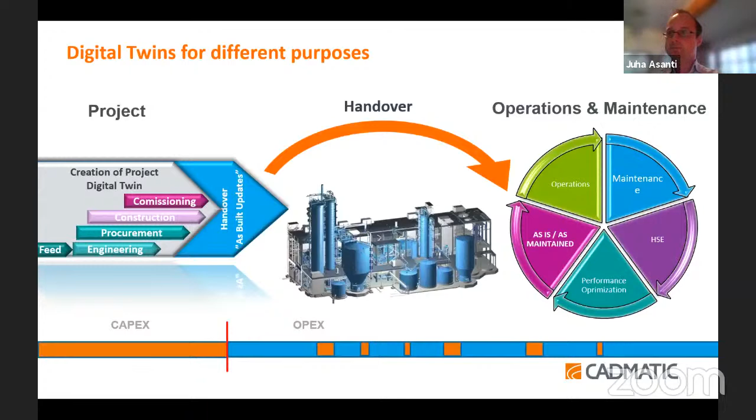Digital twins can be used for different purposes throughout the whole life cycle of a project, starting from the very early design and FEED phase, through engineering, procurement, construction, commissioning, and then handing it over to the owner or operator. It can bring huge benefits when used in operations and maintenance, as we see every day when discussing with our clients who are taking advantage of this technology.

About the creation of the digital twin, how you get the maximum out of it is that you start building this kind of digital twin from the very early beginning of the project. That is when you are doing the 2D and 3D design of the plant, so you get all the design information. Then you connect all the project related data to it, like project management systems, ERP, document management, project planning and so forth. When these are all connected from the beginning, that's when you get the maximum out of it.

In this picture, trying to simplify how you create a digital twin, basically you have the 3D model and then you combine it with different kinds of databases within the company, or can also be outside the own company.

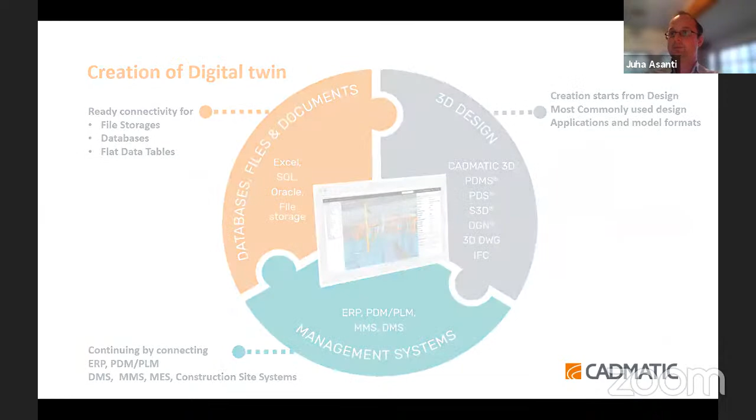Some of the use cases, and what I'd like to remind is that only the sky is the limit when you're building your digital twin and going through your digital journey, because the opportunities are huge, and there's no two companies using digital twin in exactly the same way. Companies can and should build the digital twin around their business models and applications. But some of the crucial elements of a digital twin are first of all, you need an easily accessible web-based system which can be accessed regardless of physical location.

You need to be able to access the model, the digital twin, in a fast and easy way. Then you have documents integrated or accessible, so within this digital twin you have access to all project related documents with just a simple click. Then you have these external systems integrated, like ERP and document management, just to name a few.

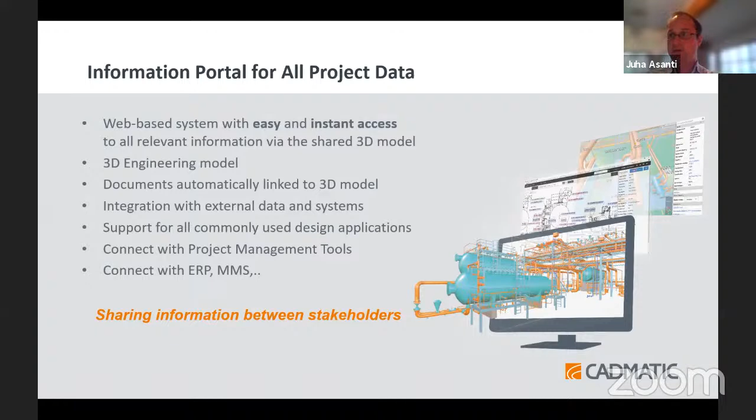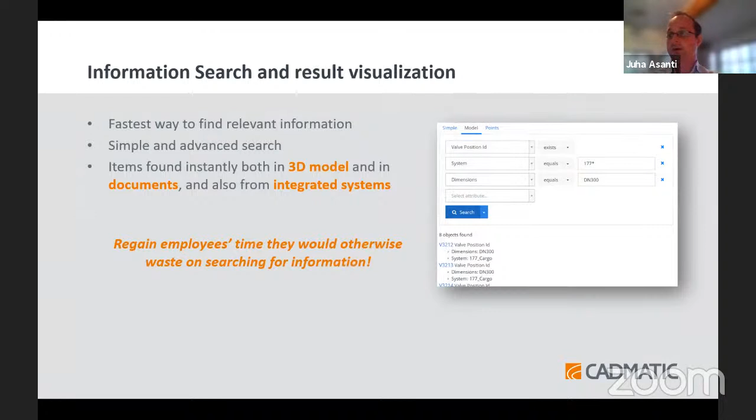Searching information has to be easy, so instead of going through all the different documents or applications, you can simply use simple search functionality, type in a keyword, and it gives you all the data regarding that specific object you are searching for.

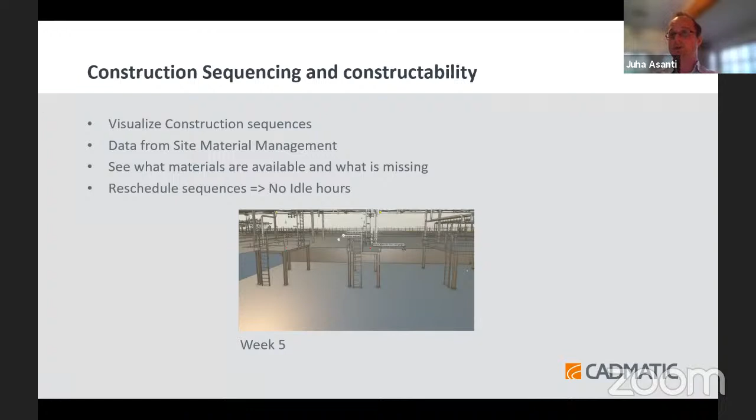Construction sequencing and constructability is one example of a use case. You can easily visualize construction sequences, how the model is constructed, by using different color coding, like here in the picture. It's very easy for project stakeholders to see how the plant is actually constructed.

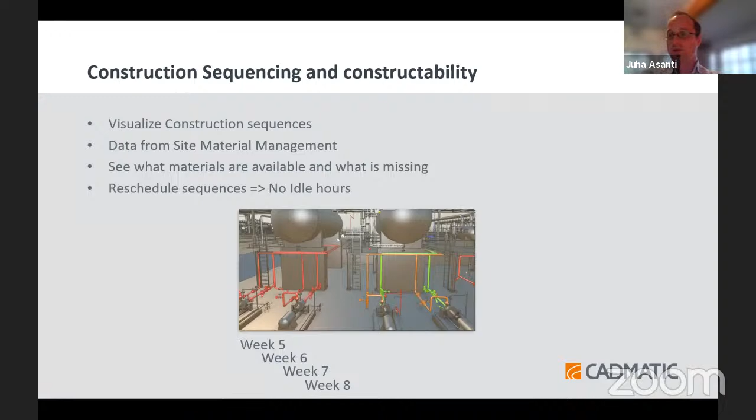In connection to seeing material availability, you can have a link or integration to the warehouse material management, so you can see what is available and what is not for the time being. Regarding constructability, when integrated with constructability analysis systems, you can have prefabrication analysis, for instance, and construction progress monitoring.

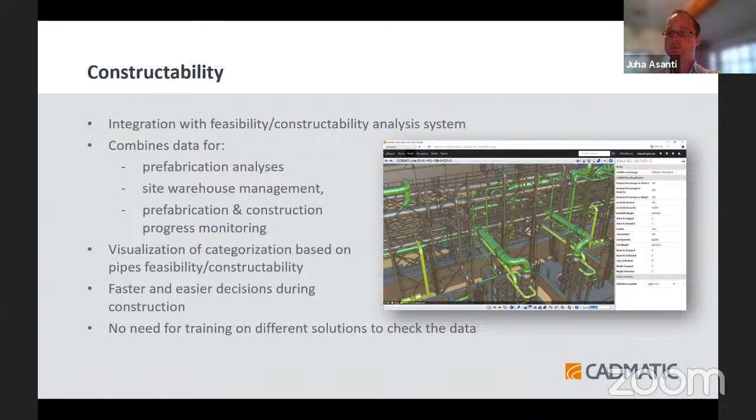Following progress with mobile devices - what is essential in today's world is that you are not fixed to a laptop or PC, but you have all this information available on your smartphone or tablet and similar devices. So you can see all the time what has been constructed, what's being delayed, and so forth.

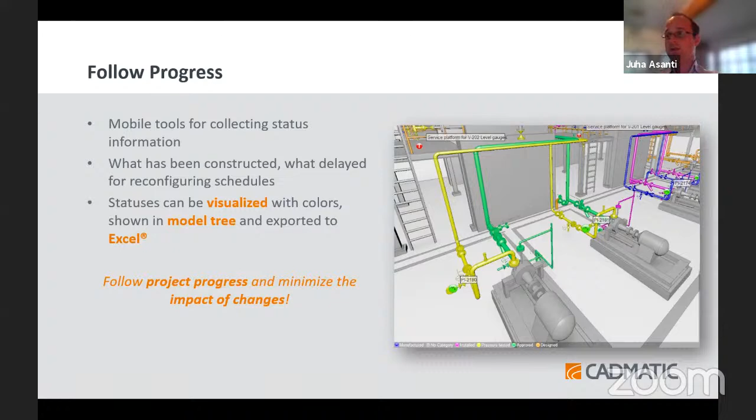Then when combined with point cloud, you can actually see how the real model compares to the engineered model. So you can see if and what kind of differences there are between this engineering model and as-built, so that you can also do reverse engineering and change the engineering model so that it's up to date with the real plant.

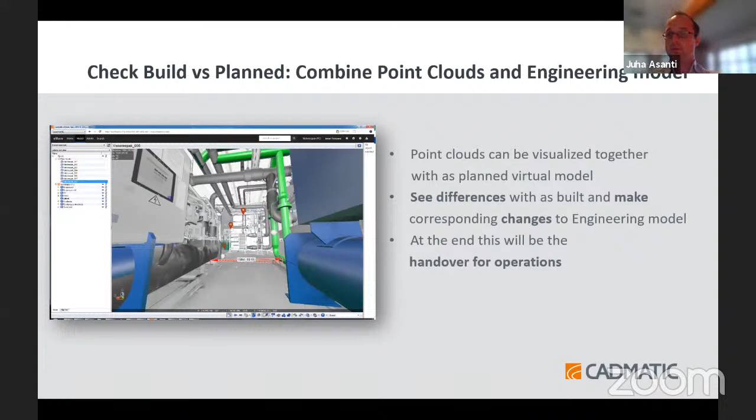One use case is communication between stakeholders in the project. So at the site, instead of making pen and paper notes of what should be changed and modified in the model, or writing emails or making phone calls to different people, you can use your mobile device and easily put your comments into this digital twin model. You can make screenshots or comments, and immediately send this to different project stakeholders for them to make those changes.

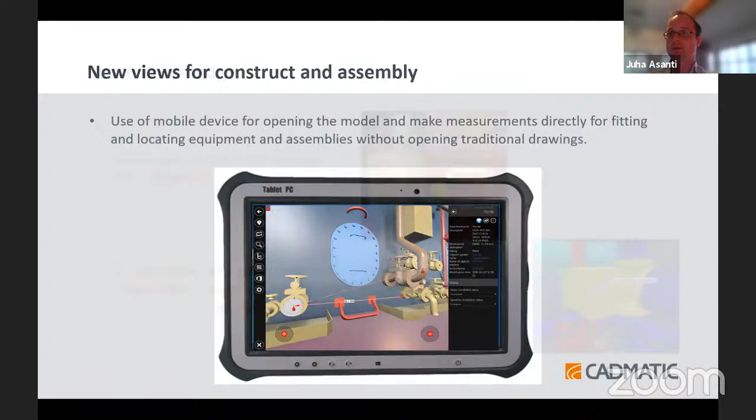Approval and commissioning, next. Using the mobile device for all this is essential nowadays. And yes, sharing knowledge.

Then one still kind of new thing is using augmented reality or virtual reality in combination with the models. This digital twin technology has to be able to support AR, VR technology and VR glasses, so that you can put on those glasses and that will basically take you on site. As we can see in this picture, the guy is wearing those glasses and he's actually acting as if he would be in the real plant, although it's only being designed still.

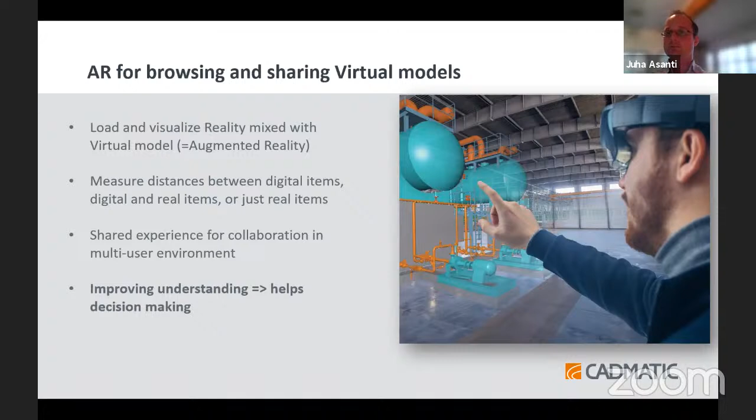So basically how Cadmatic addresses this issue is that we have been developing this digital twin concept and technology for over 10 years already. As a result, we have numerous applications around the topic nowadays, so basically we are supporting all of what was previously mentioned.

These tablet devices and mobile phones and PCs, tablets, virtual glasses - all these different kinds of devices we are supporting, but the point is that they all are connecting to the same model. That is definitely an advantage. So basically we are supporting with our technology all what is available in the market at the moment.

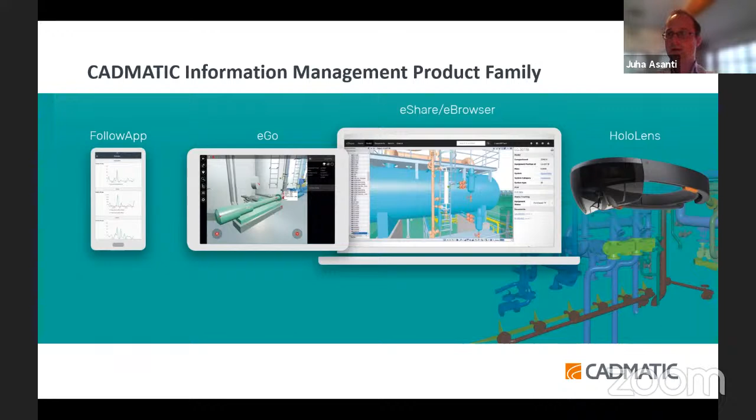Numerous clients are using these different applications, like Saudi Aramco is a good case example, which was also mentioned in the introduction. They are taking full advantage of this technology along with other clients in India, in the Middle East, and other parts of the globe.

Basically our concept is the single source of truth, meaning that from within the 3D application or 3D view, you can access whatever widely used database, regardless of which design application or platform the 3D model was originally made for. So it can be something else than our own design application as well - we can visualize that and build a digital twin around that model.

Yes, so that's, I think I have more or less used my time. Thank you for this opportunity to walk you through this exciting concept.

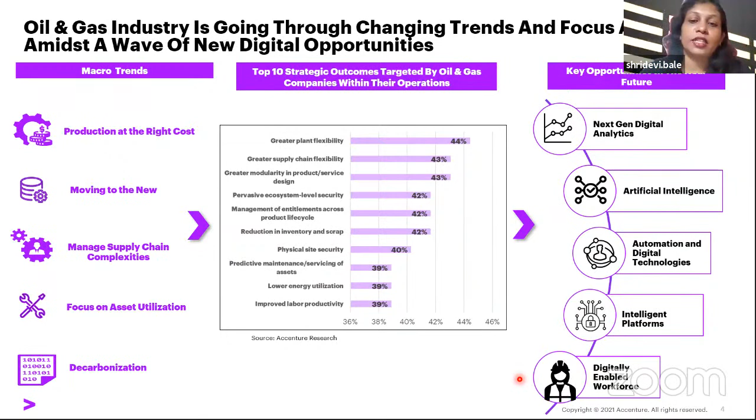Now, this is what we see as the trend and how the digital technologies or the digitalization can make an impact.

Having said this, let's quickly get into some of the assets or solutions what we are building in this direction. So the first one is enterprise digital twin. Now, this is not the same digital twin as Mr. Asanti was referring to, or for that matter, when Mr. Atul was referring to. This is a digital twin which is more a process-related decision twin. It is not actually going to show you physically the digital image of a physical asset as such.

This enterprise digital twin, or EDT, helps us connect data and decisions through a system-level view, enabling businesses to unlock trapped value and improve margins by 20 to 30%. It helps move from time-consuming siloed analysis and decision-making to immediate enterprise optimization and synchronous decision-making.

EDT focuses on optimizing at each asset level - it can be a refinery, an oil producing field, or unconventional asset - for margin, production, and most importantly, carbon. It also considers optimization at the function level, like finance, supply chain, marketing, sales, and maintenance. EDT is a decision-making platform which stitches together all assets and enterprise elements in a digital form, helping us manage both CapEx and OpEx. That's the key difference here.

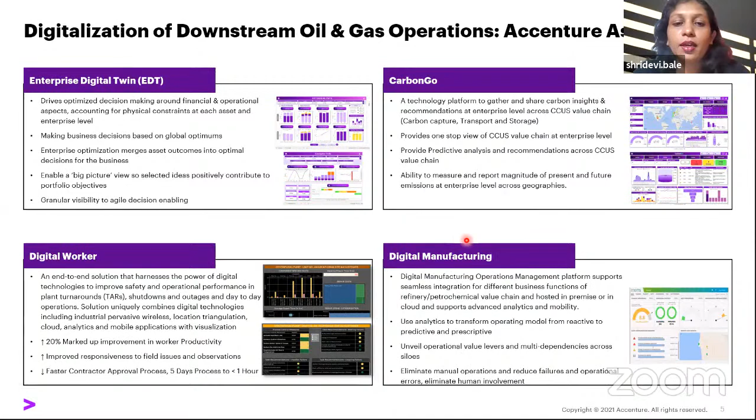So as Sri was saying, digitalization in downstream operations is capable of bringing cost reduction as well as significant process improvement and new ways of working to reality. Accenture has its own set of solutions which comprehensively bring these benefits to reality for multiple clients globally, and one of the solutions is digital manufacturing operations management, or digital manufacturing, as we can call it in short.

I will cover this solution in three folds: one is why digital manufacturing, second is what it brings to the table, and third is how it can be leveraged, or how it is delivering the solutions.

First, why should one look at digital manufacturing as an important enabler of digitalization for downstream businesses? This is based on 5 key levers: work digitally - eliminating manual operations completely by introducing advanced automation in every single activity that takes place in downstream manufacturing; second is tightly integrating IT and OT systems across L2 to L4 of all applications, functional things of ISA 95; third is being responsive.

This is about agile operations enabled by real-time data, which makes us take proactive decision-making and proactive actions. Fourth lever is bringing in predictive capabilities from the solutions, leveraging analytics and data science. Fifth, very important, is how to run reliable and safe operations by reducing human errors, safety incidents, and operational errors. All 5 levers are leveraged by digital manufacturing assets to bring these benefits to downstream businesses across all components of the manufacturing spectrum.

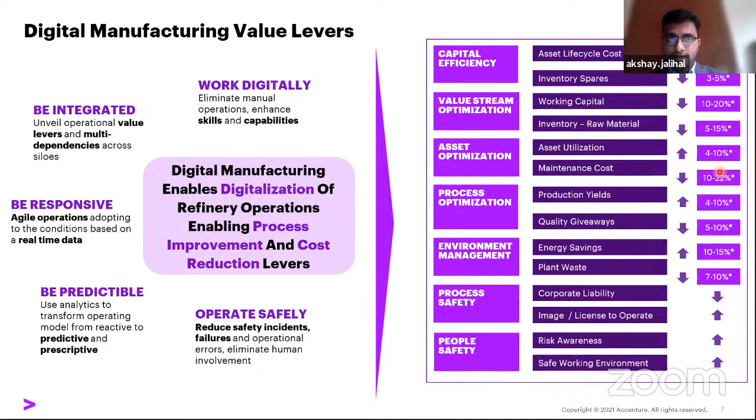Now we have seen why digital manufacturing should be looked at. Secondly, I would like to say what this solution brings to the table. When we look at manufacturing, it spans across incoming crude to outgoing products. All these activities, every single action that takes place during this, has been structurally categorized into 5 functional areas aligned with ISA 95 in digital manufacturing solutions.

So if you can see, production operations management, regulatory compliance management, reliability and integrity, inventory operations, and quality operations. These would be the key functional areas of digital manufacturing, under which you can see individual tabs, which are the tactical solutions delivered via IT and OT integration system.

So production operations basically spans across production planning, production scheduling, operational instructions, including mass and energy balance, right? RCM, which is regulatory compliance management, typically focusing on compliance with respect to environmental science as well as safety operations.

Reliability and integrity, as its name suggests, it takes care of strategy and execution of asset reliability, inspections, that is integrity, and maintenance execution part of it.

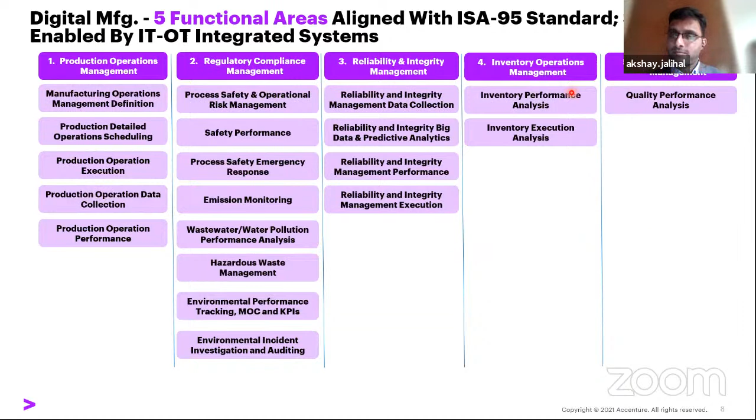Inventory operations takes care of inventory management, inventory control, right from feedstock, intermediate products to finished goods. And quality operations, as its name suggests, takes care of quality assessment and quality performance management of all the products which are considered in the downstream operations.

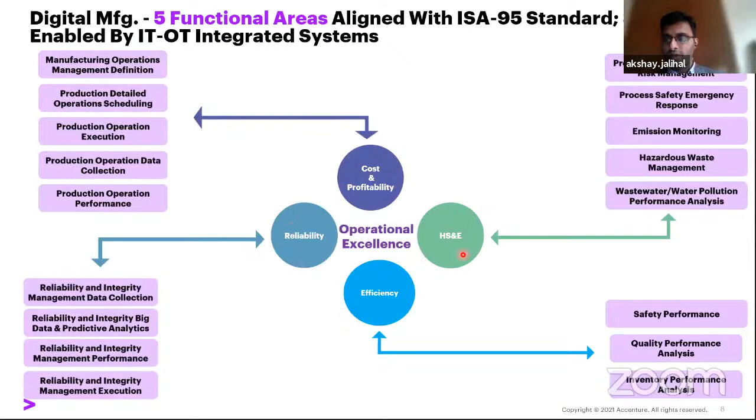Now, all these 5 solutions are enabling downstream businesses to achieve operational excellence via these 4 key pillars, which is cost and profitability, reliability, efficiency, and health, safety, and environment, right? So next part would be how digital manufacturing takes this to reality, or what solution it basically is talking about.

So if you see this ISA 95 structure from L2 to L4 layers of applications. So L4 is basically dominated by ERP, and predominantly we see all SAP solutions over here. MOM stays over here. Of course, it overlaps with L4 and L2 in certain cases, but L3 is where it is quite dominant.

So if you look at it, the first layer, that decision support and visualization system, which is the key USP of digital manufacturing. So what differentiation that it brings is DSV gives you the role-based dashboard across the 5 solutions we just saw.

So for example, if I talk about production operations management, digital manufacturing gives you the role-based dashboard across production engineer, production planner, as well as a general manager and engineering manager, where they can customize the KPIs which they want to look at, and thereby perform their activities as well as the reporting, right? So we would look at the reliability specific DSV layer, how it looks like in later stages.

Next layer is all about integration layer, and this is where IT and OT come together. So you can see multiple COTS or market ready products, all the logos over here, but not all the products are capable of sending the data, receiving the data based on the business processes of every individual client operations, right? So this layer takes care of bringing that together in terms of digitally enabling all the data exchanges and activities or even workflows.

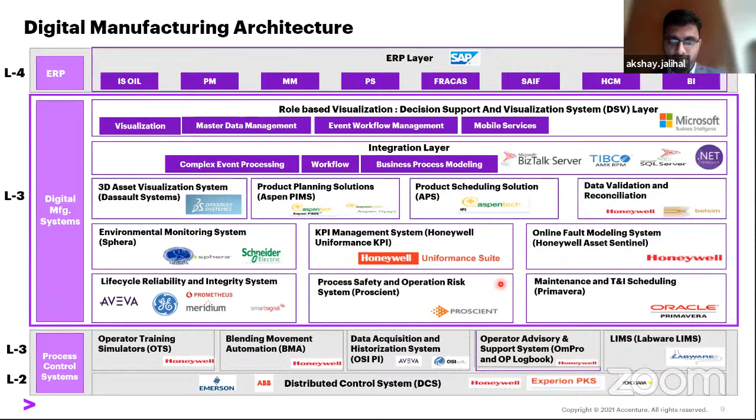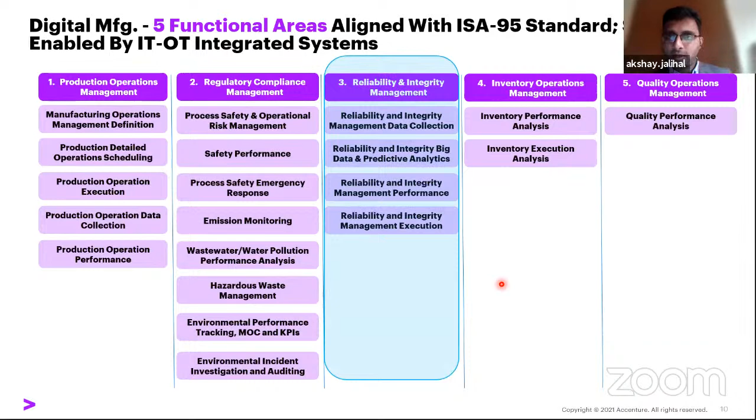Coming next, now that we have seen all the 5 areas, why, what, and how of digital manufacturing, let's quickly look at how one of the solutions can digitally enable all the business processes under that domain. Now, reliability and integrity management, as we said, specifically takes care of the strategy and execution part of efficient maintenance execution, reliability strategy, inspection strategy, and bringing it together as digital or connected asset management.

So with the earlier or conventional way of reliability operations, clients we have seen always had questions like, do I have a foundational asset data? Do I have the right maintenance strategy in place? Am I spending too much on maintenance activities? Is asset performance attribute being tracked in real time and shown on the dashboard whenever you start your day in terms of bad actors? What is my asset risk associated with it?

Are there any IOW violations? What is the cost trend I'm looking at? What are the collaborative workflows, MOCs, for example, management of change? Are there anything which is pending? Then performance visualization across asset health as well as integrity of the equipments.

And then it is supported by conventional reliability practices like proactive asset strategies such as RCM, FMEA, what is my RAM modeling, predictive analytics, risk-based inspection and maintenance, asset lifecycle management. Weibull study I can cover over here, which can send the advisories and insights at this level. Then predictive modeling, work execution, as well as the balanced risk and cost analysis studies which I can combine.

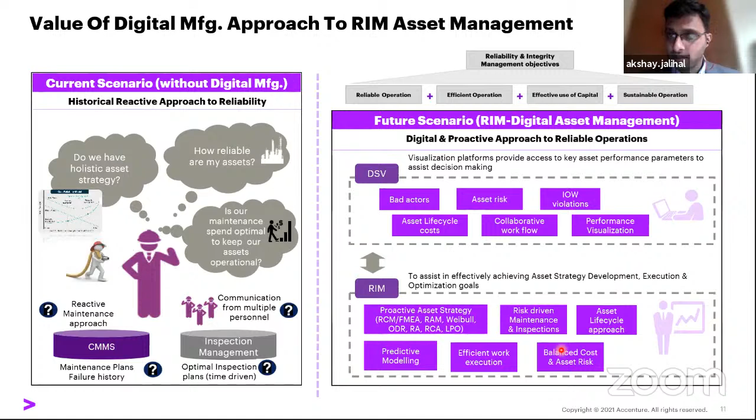I would like to give an example of a day in the life of a reliability engineer who is leveraging digital manufacturing. As a reliability engineer or maybe a reliability manager, when I come to the office in the morning, all I'm concerned about is how my assets are performing, which are the key factors waiting for my attention, or which are key priorities I should have in a day, and what kind of reports I would be presenting to my leadership.

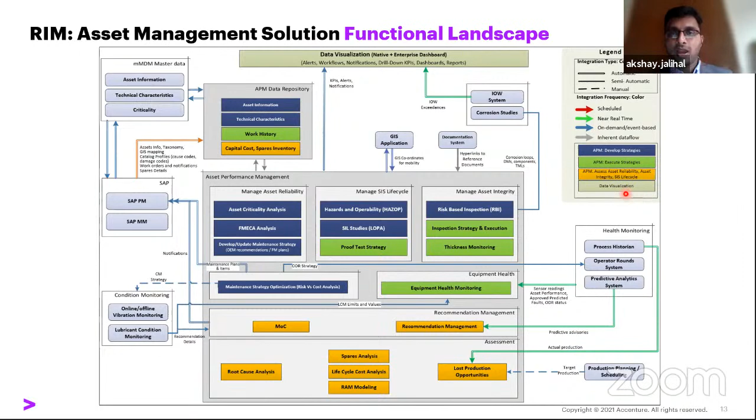So based on this solution, these are some key benefits which we touched upon, and how these leverage the cost benefits which we saw at the beginning around digital manufacturing.

The RIM component, which mostly centers around asset management, is contributing to significant cost savings around asset lifecycle cost and inventory of spares. It increases asset utilization, reduces maintenance cost, and since we are connected to production planners too, it also helps increase production yields by reducing production interruptions.

And of course, it's all a risk-based, systematic approach towards reliability, maintenance, and integrity. It definitely builds the risk-associated culture in the organization.

Now one might ask, we saw multiple logos which are market-ready products on the architecture. What is it that Accenture brings in?

So what Accenture does is we have services across strategy and consulting, where we sit down with downstream businesses, CXOs, to understand what are the key improvement levers for cost reduction, process improvement, as well as new ways of working. Those are translated into functional specifications, which are very specific to client to client, based on the practices they do, the activities they perform, and the department structure they have.

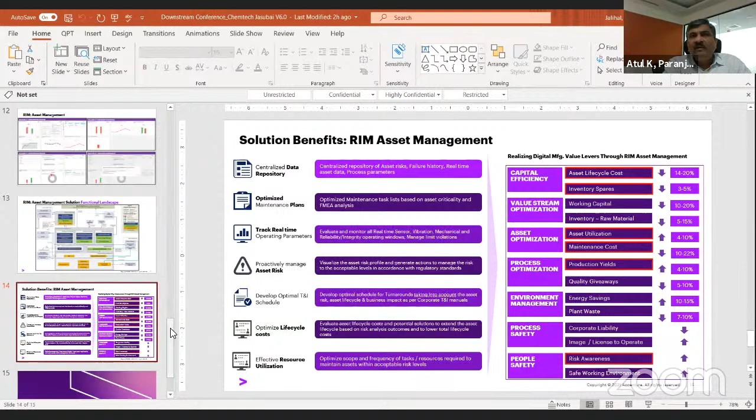There is a question from the audience. We see a lot of challenges when it comes to making investments from an ROI point of view in digitalization. So how do you address those? Because many of these are quite expensive investments, whether it's software or hardware or whatever it is, and you'll see results only maybe after a year or two. Anything which is less than a year gets invested or gets immediately sanctioned, but anything which goes beyond a year, then there is a problem. So how do you do that? That's the question, which is a question I also have, by the way. And I think you know the answer as well.

So there is no silver bullet for this, right? We all know it also depends on the scale of projects. Of course, low-hanging fruits like a quick LP program being converted into AI ML kind of algorithms, that kind of stuff is relatively easy, and it's a point kind of solution. But when you're talking about a large scale implementation like digital manufacturing or the enterprise digital twin which I was talking about, that definitely needs time. It needs at least 1 to 1.5 years, depending upon how many assets and asset classes you're trying to get under, and the functions you're trying to bring under the hood.

So there is no simple answer for that, Atul. You have to have a snapshot of what was the state before digitalization and what happened after that. And the benefits you get from a digitalization perspective, I think Akshay had one slide wherein he showed different elements and gave an indicative range across your asset management, your proficiency, your efficiencies, reduction of inventory spare cost, all that kind of stuff. So it has to be divided amongst those key things, and then the value has to be aggregated.

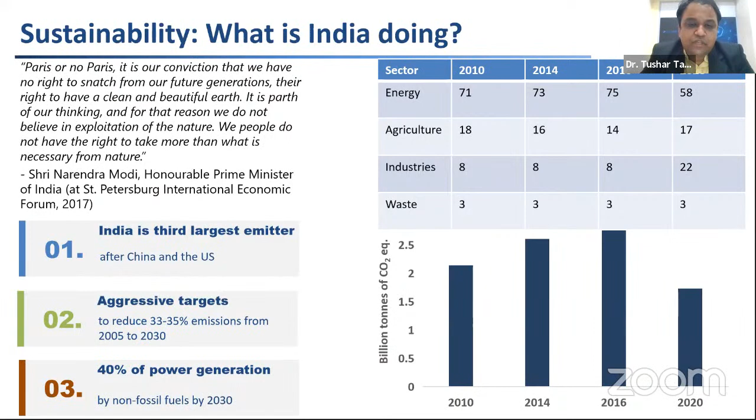Now that we have understood the problem, let's see if we have some methodology to deal with this. So there is an interesting concept called the triple bottom line, which was introduced by John Elkington around 25 years back, and this essentially tries to integrate the three important aspects: profit, planet, and people.

Traditionally the approach of the industry has been to focus only on one of the bottom lines, that is the profit. So how to increase the yield and the efficiency, what to produce, how to respond to the market, for example how to produce, what to produce, and how much to produce. So there is a lot of dependency and uncertainty around the raw material prices, the raw material availability, and of course the market demand also fluctuates.

So there have been solutions in the market like APC, which is advanced process control, and asset performance management, as Akshay was talking about in his previous discussion. But these means are not enough. There has to be something else to this.

So when it comes to the people, we all understand that it is the operators who are running the plants, and the overall success of the operation depends solely upon the efficiency of the operator. So why not deploy some of the state-of-the-art solutions?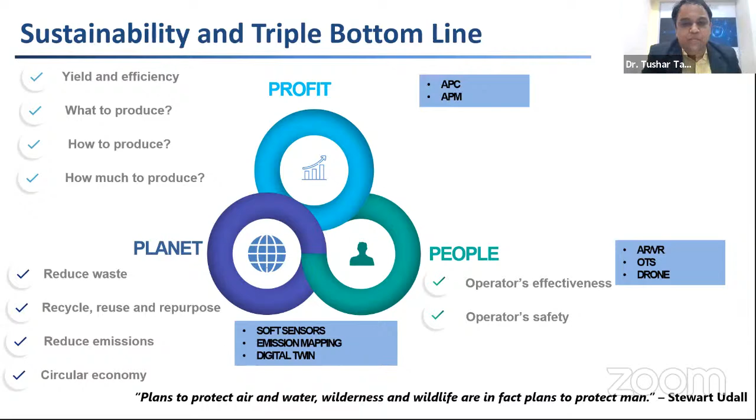And that brings us to another interesting concept, that is the digital thread. So just for the interest of everybody, let me reiterate the definition. It is a communication network that enables a connected flow of data as well as an integrated view of an asset's data across its lifetime through various isolated functional perspectives.

So in a nutshell, a digital thread allows us to collect and collate all the data from various sources and derive some useful insights from that. It allows us to transmit the correct data to the correct people at the correct time. So essentially it is a seamless integration across all the disciplines, so that there is no information leakage, there is no miscommunication, there is no lack of communication.

And this is what we call the single source of truth, as Yuha was talking about in his discussion. And there are some early adopters of this technology, especially the automotive and aerospace industries, which have realized the values and reaped the benefits also. There have been cases where these industries have been able to realize the value, such as reduction in their lead time to the market.

For example, they have been able to reduce that by as much as 20%. Also, they have been able to cut down the costs of their entire value chain by around 15 to 20%. So these are huge numbers when we actually multiply them with the scales.

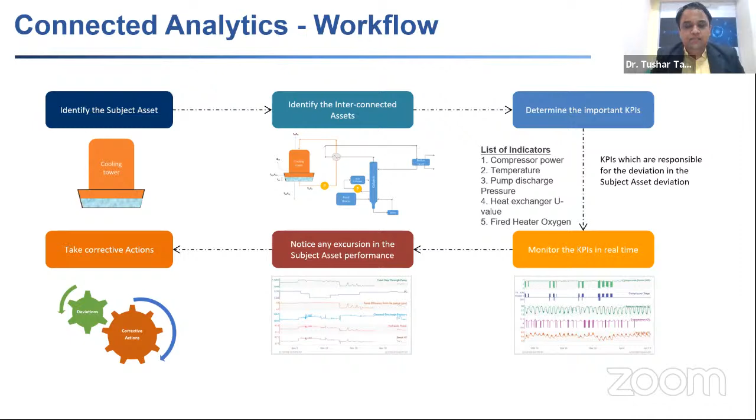Once we have identified all these KPIs of the subject asset as well as the connected assets, we monitor those KPIs in real time. This allows us to identify if there is any anomaly or abnormality in the data observed, in the KPIs that these individual assets are producing. That helps us take the corrective actions eventually, so the entire time and effort is reduced, and also the solution is more reliable.

In this case, we have identified all the KPIs of all the connected assets in the case of this cooling tower: heat exchangers, pumps, and of course the KPIs related to the cooling tower. We have identified only the critical KPIs. Not all KPIs need to be considered in case of connected analytics; only the critical ones are required.

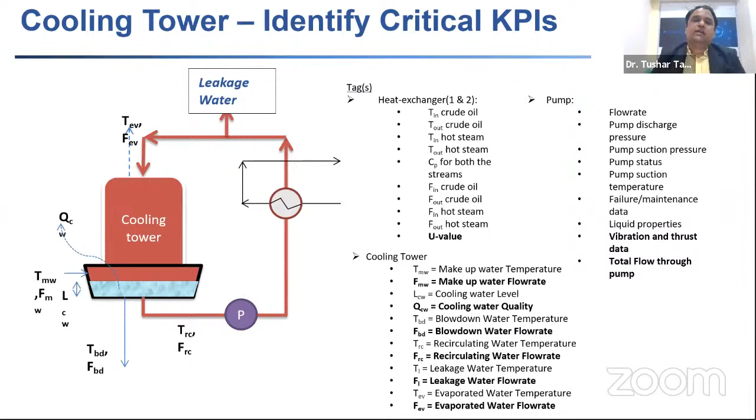Once we do that, as the next step, we observe all these KPIs in real time in a single window. Using this layout, it is much easier for us to identify if there is any abnormality, say for example in the compressor efficiency or compressor performance, whether the heat exchanger is behaving properly, whether the pump is also operating as expected. This complete picture helps us identify if there is any problem in the system.

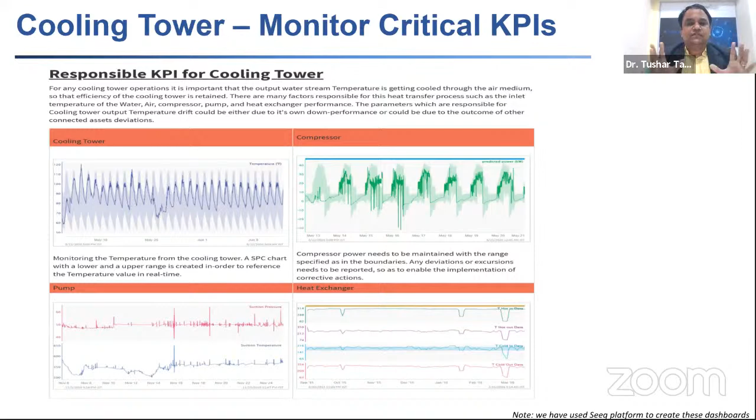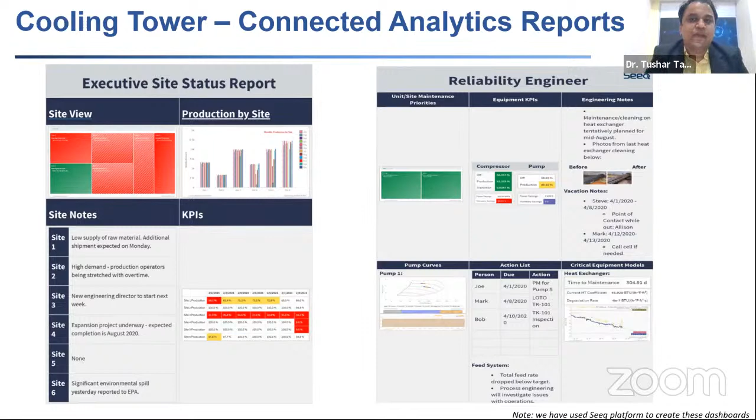So this is very, very useful. This has been implemented over the past few years, but the main focus has only been around the assets, around an individual asset. So when we integrate that, it actually adds a lot of value to the entire exercise.

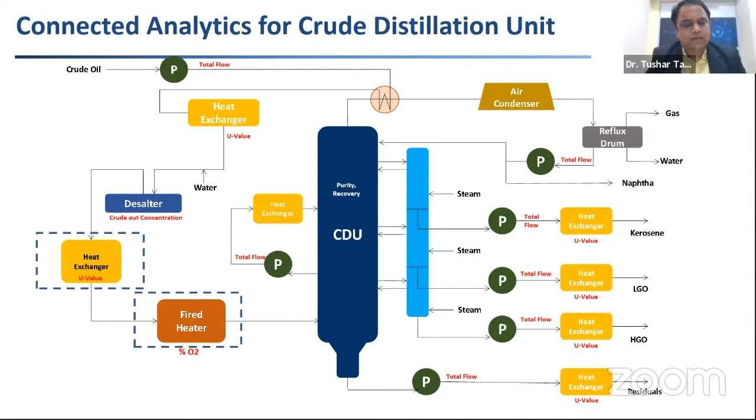It's just the extension of the digital thread applied using digital solutions, that is the connected analytics, but it adds a great value to your ecosystem.

Now, talking about Tridiagonal Solutions, we as an organization were established in the year 2006, and we are a byproduct of the National Chemical Laboratory at Pune. We have almost 80% of our business coming from the US and Europe, and almost all our clients are either Fortune 100 or Fortune 500 companies.

We have around 80 plus professionals. Most of these people are either masters or PhDs or even postdocs, and they are our real enablers. We recruit only from tier 1 institutions all across the globe. So far, we have executed more than 900 projects in practically all the sectors of chemical industry.

So we basically serve three core areas. One is advanced modeling. The other one is application engineering, where we cater to the client's requirements and develop custom-made applications for our clients. And the third one is process analytics, the group that we are actively working with. This group essentially caters to various sectors of the chemical industry and leverages advanced solutions such as asset performance management, advanced process control, or even custom-made solutions around data analytics.

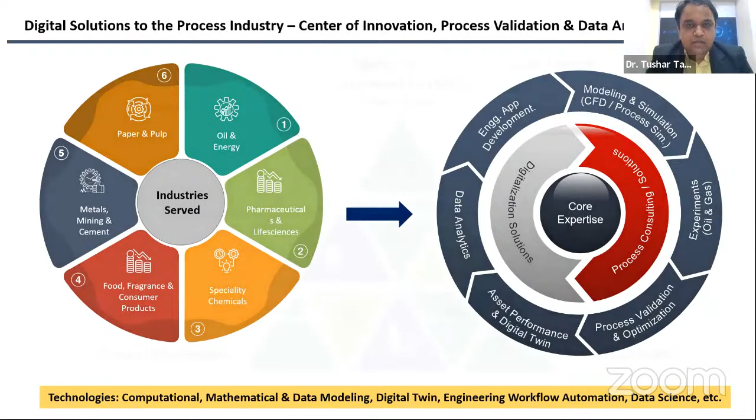So our foundation lies mainly on two aspects, that is process understanding. We do that using mechanistic modeling and simulations, and we have a team of experts dedicated for that. We also have another aspect called process optimization, which is essentially performance improvement. And we combine both these aspects in order to achieve ultimate operational excellence. This entire thing is completely data driven. We have our entire ecosystem at our disposal, and we have partnered with different technology majors, such as the ones that you can see on the screen.

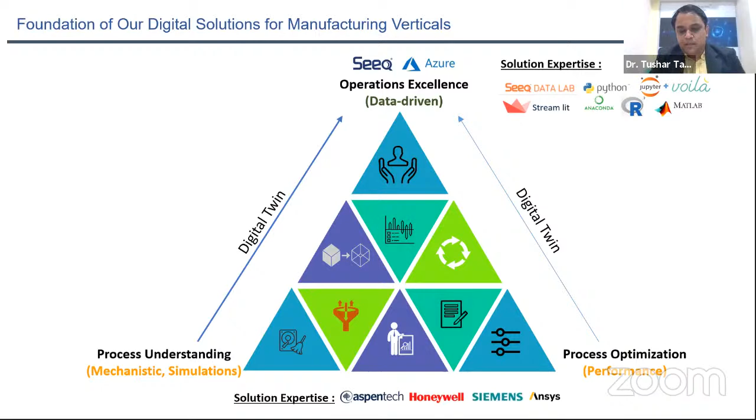Thank you, Dr. Tushar. There is a question for you. How does the system judge good data and bad data amongst the millions of live data points collected from SCADA, DCS, etc.?

So for that, you need some kind of domain knowledge, because data analytics is just garbage in, garbage out. Unless you filter out the data and remove the noise, you can't get a good result. You will get some model, but that model may be some junk model.

So for that, first you need some domain expertise to understand if there are outliers. And then once you know, for example, if there are process constraints with respect to temperature values, or if pressure is not allowed to go beyond a certain value, and the data is showing that, then that data needs to be discarded.

On top of that, you can apply your usual data analytic techniques to come up with a good data set.

Like you say, you do connected analytics. So you have SCADA systems, and individual equipment or assets are anyway connected, and you're getting some readings on that. When you want to connect them together, do you have to put additional sensors or additional data points for capturing that, or how do you do it?